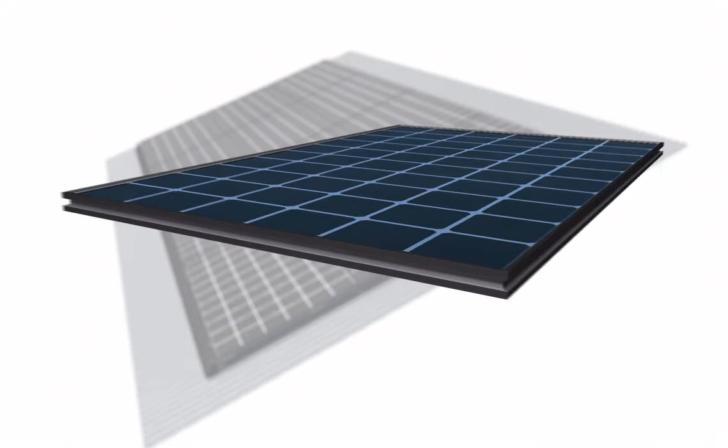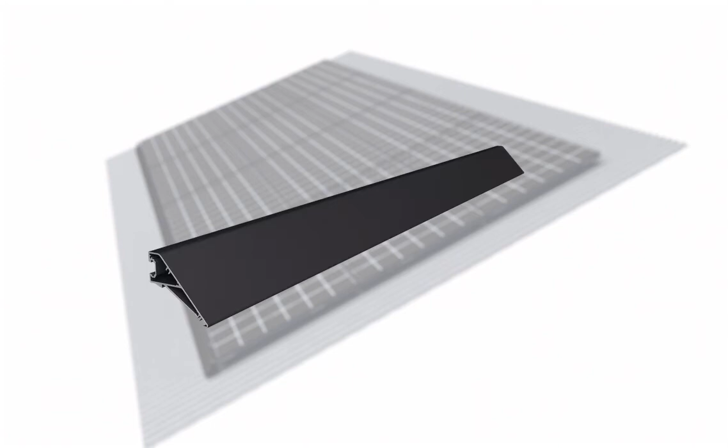ZS Trap utilizes Zep-compatible PV modules that are manufactured with Zep Solar's innovative Zep Groove frame design and are designed to receive Zepp system hardware that locks into the Zepp Groove. The core components of ZS Trap include the trap mount, the leveling foot, the array skirt and cap set, the interlock, and the Ground Zep.

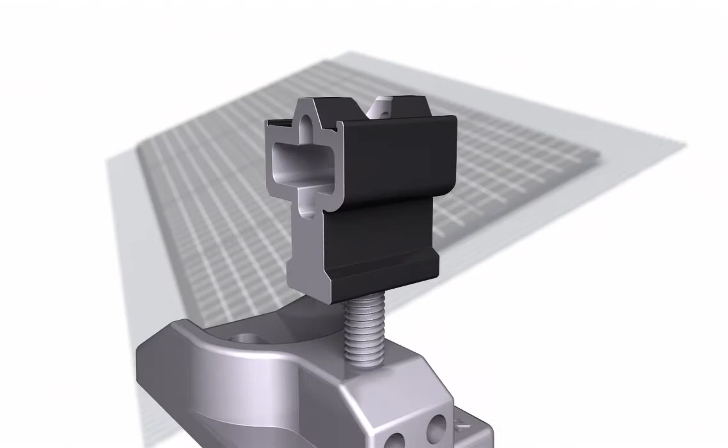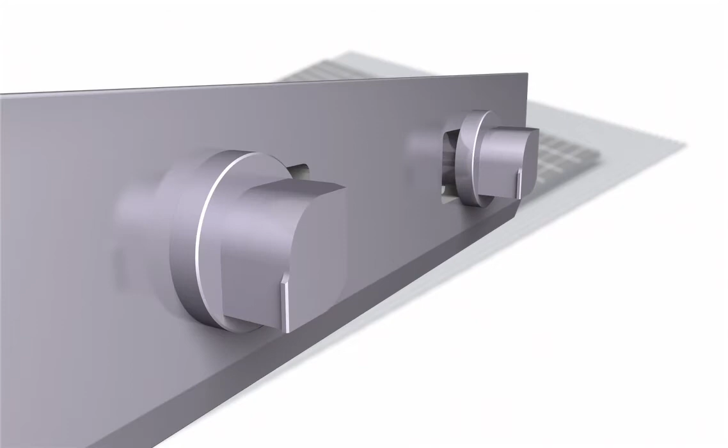The upper portion of the leveling foot contains a Rock-It, which has a key side and a tongue side. The key side rocks into the Zepp Groove, and the tongue side receives the Zepp Groove of an adjoining PV module. Interlocks contain Zepps, which are also designed to mate with Zepp Grooves.

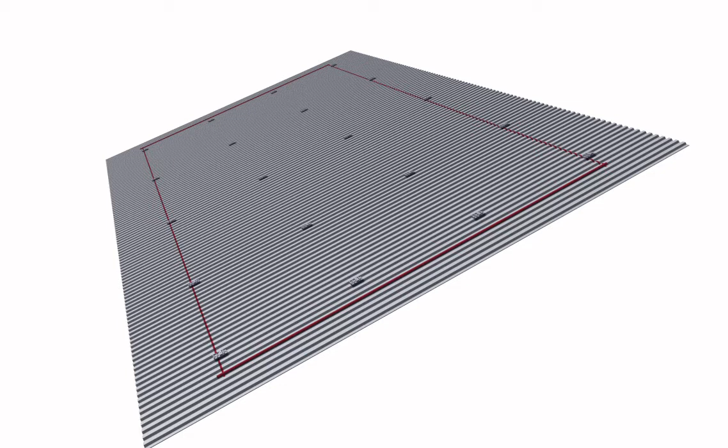Once the PV array mounting area has been established, the perimeter of the array and the rafter layout are marked with chalk lines. The first row of trap mounts is then installed. Remaining trap mounts are then laid out according to north-south spacing specifications found in the ZS Trap installation manual, which can be downloaded from the ZS Trap product page of the Zep Solar website. Trap mounts provide the structural connection to the roof and protect against water intrusion.

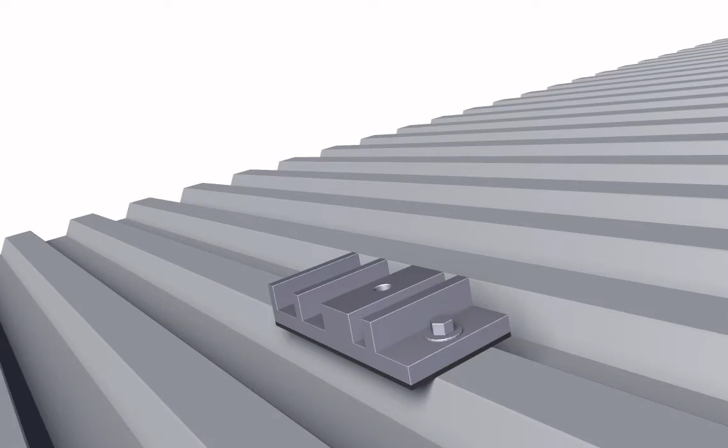Next, the first two leveling feet are installed at the opposite corners of the front row with their key sides facing down roof. A leveling foot is installed by placing it squarely on the trap mount and securing it with a machine screw. By pulling a string line from corner to corner, proper alignment of the remaining leveling feet is assured.

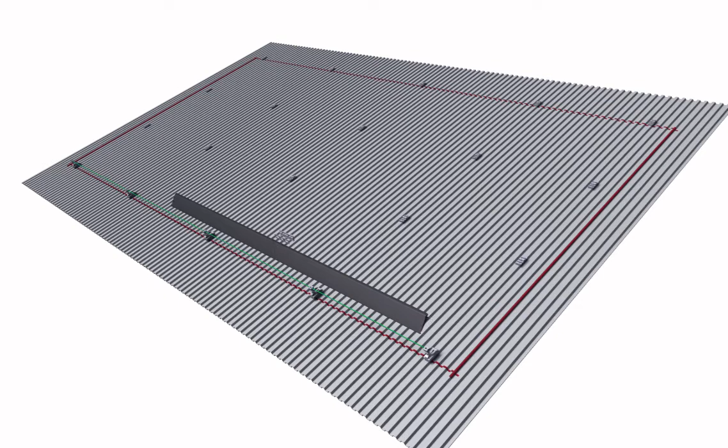Once the front row of leveling feet is installed, the first two array skirts are coupled together with an interlock and an interlock spacer. The interlock is installed by inserting its key side into the Zepp groove of the array skirt at a 15-degree angle and then rotating the Zepps 90 degrees with the Zepp tool so that the timing marks of the tool align with the marks on the top surface of the interlock.

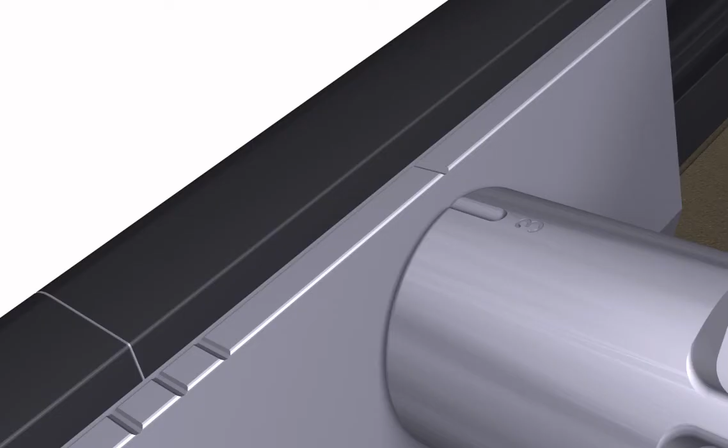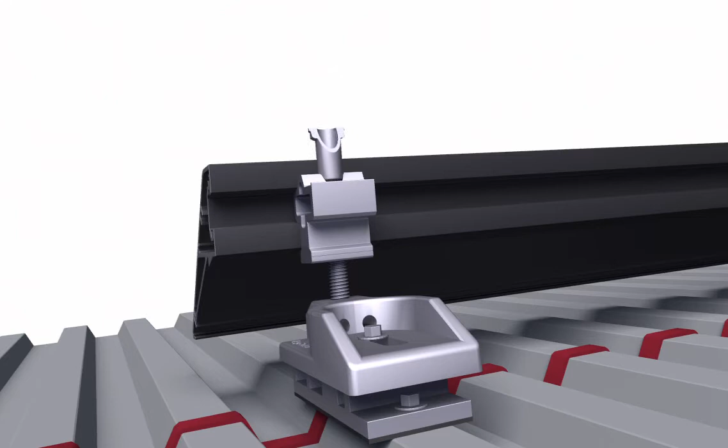Once the first two array skirts are mated, they are rocked on to the tongue side of the leveling feet rockets at the west end of the array, and jambs are inserted into the tops of the rockets to prevent the array skirt from rotating out. Next, the third array skirt is rocked onto the leveling foot, an interlock is installed at the seam, and jambs are inserted as before. This process is then repeated for the fourth array skirt.

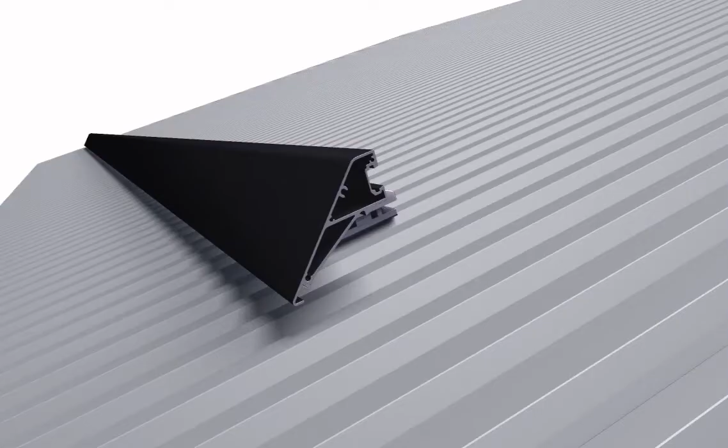The array skirt is finished by attaching the array skirt end caps to the exposed edges of skirt using the two provided screws. Once all of the array skirts have been installed, the first Zep-compatible PV module is dropped into place at the lower corner of the array. This is done by resting the Zep Groove on top of the tongue side of the leveling foot rocket and rotating downward.

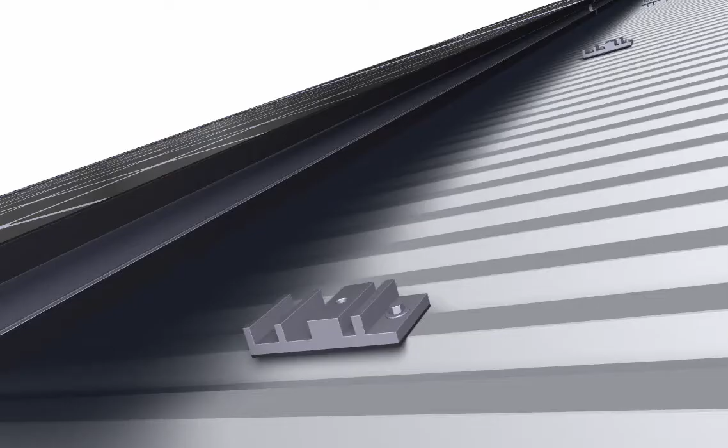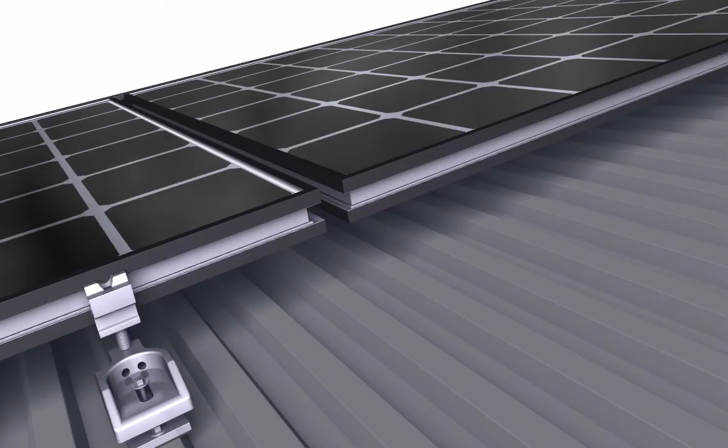A leveling foot is then mated to the upper edge of the module by rocking the key side of its rocket into the module's Zep Groove. Then, the leveling foot base is secured to the corresponding trap mount using machine screws as before. This is then repeated for subsequent modules, and interlocks are installed along the upper edge between each module. The process is repeated for subsequent rows.

Finally, a Ground Zep is installed at the perimeter of the array to receive the array's equipment grounding conductor. This completes the mechanical installation of a ZS Trap PV array.